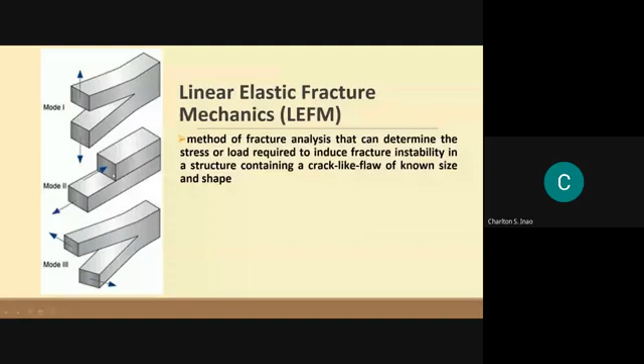If you take a look at this, using the pen... sorry, I'm just using the mouse, I haven't installed the digital pen yet.

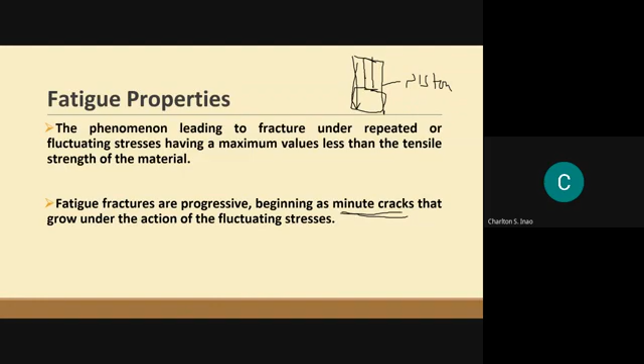Fatigue fractures are progressive, beginning as minute cracks that grow under the action of the fluctuating stress. So when we talk about fatigue, we look at where it first propagates - minute cracks, meaning small cracks, then it propagates, it continues.

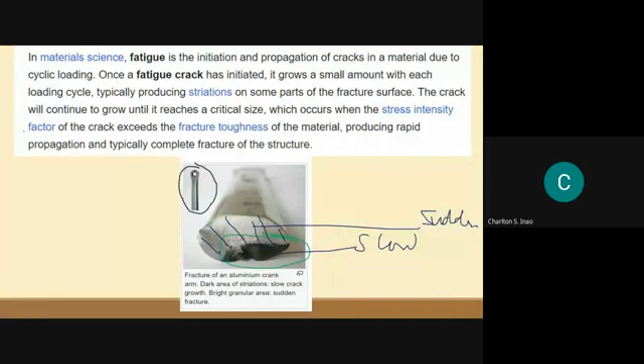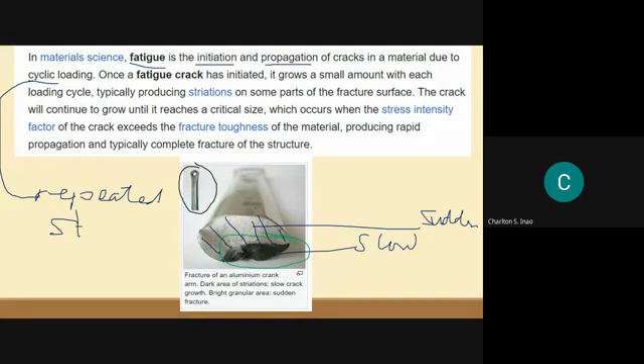So what is fatigue? Fatigue is the initiation and propagation of cracks in a material due to cyclic loading. Repeated stress, cyclic loading - those are our keywords: how it starts and how the crack propagates.

Once a fatigue crack has initiated, it grows a small amount with each loading cycle. When it repeats and continues, what gets produced are striations - on some parts of the fracture surface, this dark area here, those are the striations. It starts slowly.

The crack will continue to grow until it reaches a critical size, which occurs when the stress intensity factor of the crack exceeds the fracture toughness - this is what we discussed earlier, the fracture toughness. This produces rapid propagation and typically complete fracture of the structure. So this is the rapid, sudden part.

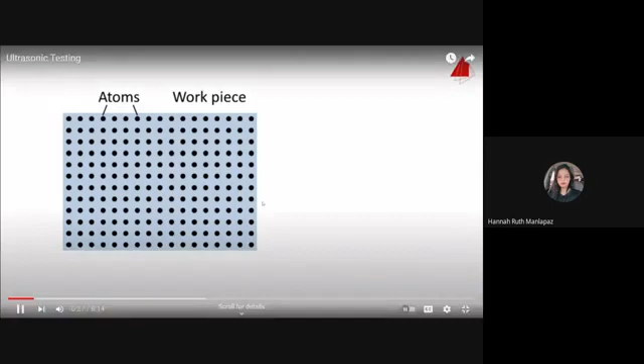Non-destructive testing, ultrasonic examination. The basic principle of ultrasonic testing of materials is the propagation and reflection of sound waves. As an example, a cylindrical workpiece is shown in the animation. The longitudinal section through the cylinder shows the position of the atoms, extremely magnified and simplified as a single crystal. A rigid unyielding stop is attached to the right front end of the cylinder. At the left front end, a disc is installed to transmit and receive sound waves. Pushing and pulling briefly at the disc causes a longitudinal sound wave to propagate through the cylinder.

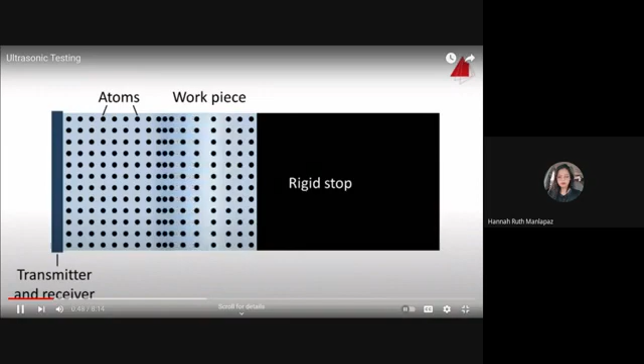When the sound wave reaches the rigid stop at the right side, it is reflected and runs back towards the disc, which now serves as a receiver. A free end is also able to reflect a wave; the tensile side runs ahead in the reflected wave and finally deflects the receiver to the right. The reflected wave is even reflected again and travels several times across the length of the cylinder, though this isn't shown for simplicity. So if a sound wave is generated at one end of a workpiece, it will travel through the material at its speed of sound.

At the free end of the workpiece, the sound wave is reflected and returns to the transmitter, which then acts as a receiver. For ultrasonic testing, not a large transmitter is used in most cases, but a rather compact one, which generates a short ultrasonic pulse.

At a place free from defects, the ultrasonic pulse travels to the right front end, also termed back wall. The pulse is reflected and recorded again as an echo.

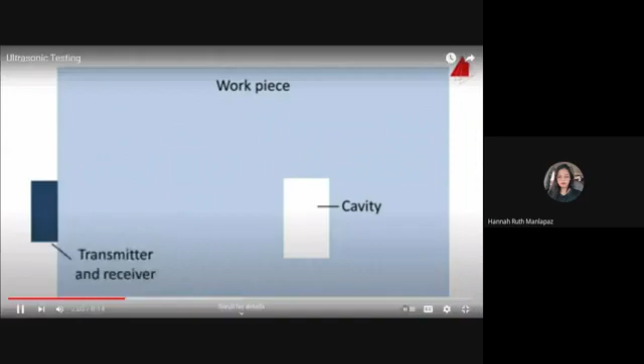When the transmitter is moved a little downwards, the cavity reflects a part of the wave. That part arrives earlier at the transmitter than the rest of the sound wave. Even further downwards, the cavity reflects the complete ultrasonic pulse.

For material testing, either the echo of a defect can be utilized, this is the pulse echo mode, or the phenomenon that hardly any sound waves pass through the imperfection, which is called the through transmission mode.

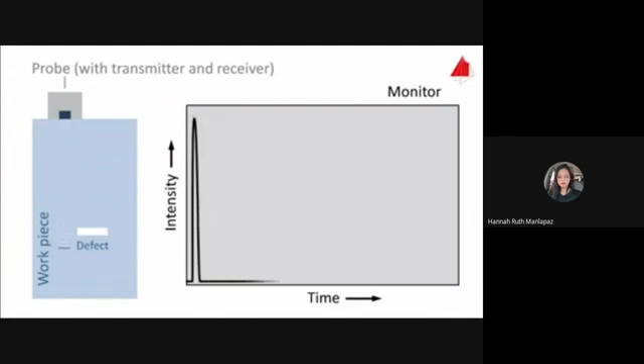In pulse echo mode, a transducer installed in a probe performs both the sending and the receiving of the ultrasonic pulse. On a computer monitor, the intensity is plotted upwards on the y-axis and the time towards the right on the x-axis. With the probe at a place free from defects, only two signals may be seen: the transmission pulse and the echo resulting from the lower surface of the workpiece, termed back wall echo.

Moving the probe towards the right leads to an additional echo created by the defect. Even further towards the right, only the defect echo is visible apart from the transmission pulse.

In our laboratory, there's a green-painted steel cylinder to be found. It contains artificial defects which are invisible from the outside. To track down the defects, the material tester uses the pulse echo method.

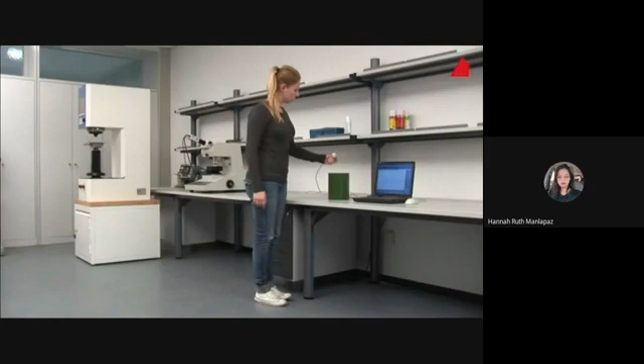This is how a typical probe looks like. Under the bright wear plate, a piezoelectric disc is installed. It can transmit and receive ultrasonic pulses. A computer operates the probe via a plug-in card and power electronics. On the monitor, the intensity is plotted upwards and the time is plotted to the right.

After placing the probe on top of the cylinder, initially no echo at all may be seen on the monitor. The reason for this is the too small contact area between the probe and the workpiece. Only with the use of a gel, the so-called couplant, can the ultrasonic pulses get into the workpiece and also go back into the probe. Now the back wall echo turns up on the monitor.

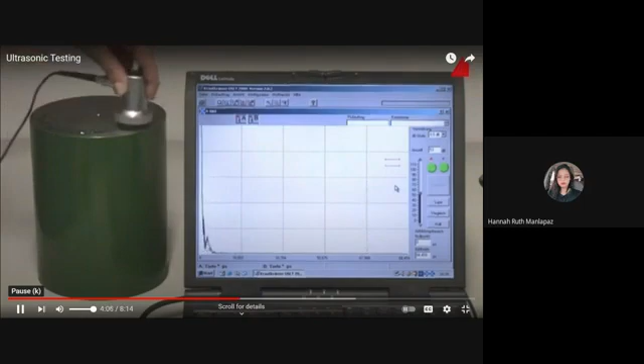The material tester spreads out the gel evenly on the top surface. That way she is able to examine the entire cylinder.

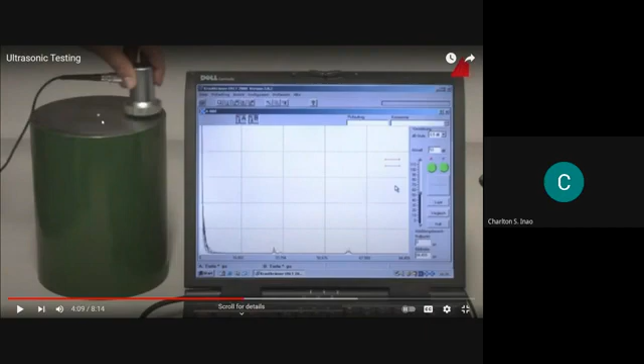Using the velocity of sound in the material, one can plot the calculated depth on the monitor to the right instead of time, a very useful feature.

With the help of so-called trigger gates, which may be set on the echoes with a computer mouse, the depth of the defects can easily be read off at the lower left-hand corner of the monitor. The cylinder back wall lies in a depth of about 200 millimeters below the probe, so the cylinder has a height of 200 millimeters. And here we go.

The material tester scans the upper front end of the cylinder with a probe and observes the monitor. A defect echo appears on the monitor. This defect is located at a depth of 130 millimeters below the surface.

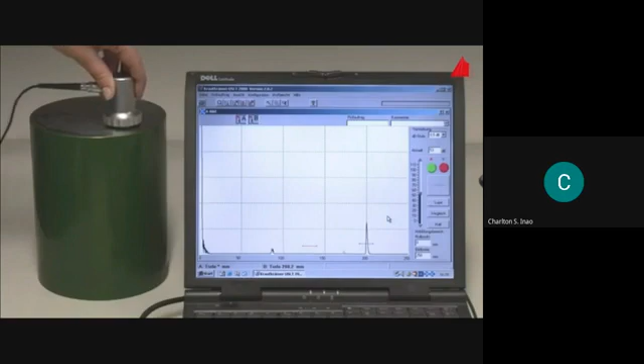Another echo indicates a defect at a depth of 87 millimeters. The second, smaller echo at 174 millimeters is caused by double reflection on the same imperfection.

And these are the defects: a drill hole and a saw cut. Filled up near the surface and painted, they are not visible from the outside. The drill hole is at a depth of 130 millimeters.

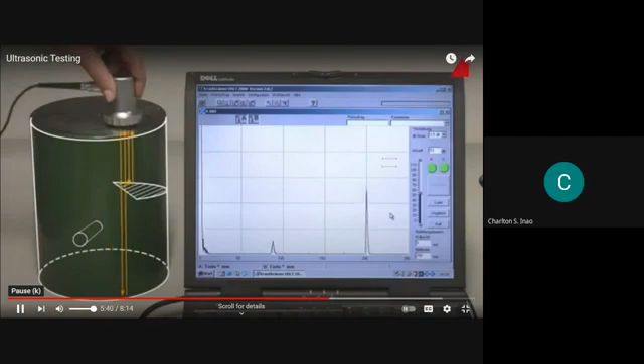The saw cut 87 millimeters below the surface.

Trams are popular means of transport in Karlsruhe in southern Germany. The tram cars are not only cleaned regularly, but also tested thoroughly at regular intervals by the transport company. Among many other maintenance points, the ultrasonic examination of the wheel axles plays an important role.

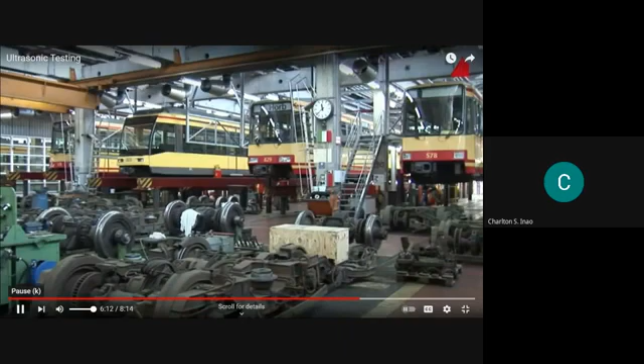A tram enters the maintenance hall for inspection. Some of the tram cars have already been lifted up, so that the bogies can easily be detached, pushed forward and examined carefully. This is one of the bogies jacked up to comfortable working height and prepared for ultrasonic inspection.

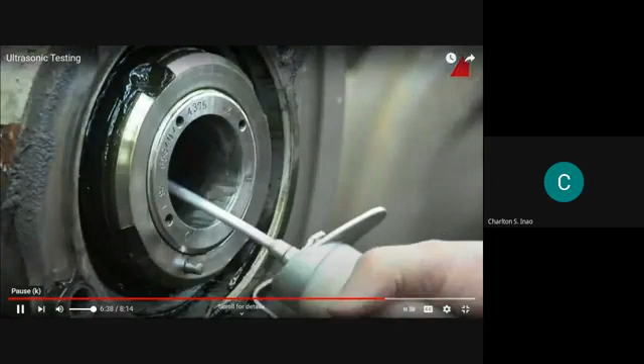Special attention is given to the wheel axle, among experts known as wheel set axle. It has been designed as a hollow axle. This saves weight and facilitates the ultrasonic examination. The material tester applies a suitable oil as a couplant into the bore of the axle.

Now he takes a special probe designed exactly for this purpose, inserts it carefully into the bore with a mount, and evenly spreads out the couplant by turning and pushing. He has accurately marked the most important examination points at the mount.

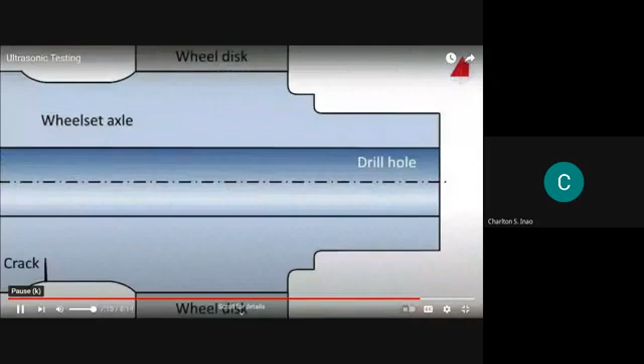In an experienced manner, he positions the probe at the appropriate places within the wheel set axle and watches the monitor closely. The probe has specially been designed for this application. It transmits the ultrasonic pulses at an angle of 45 degrees.

At a place without defects, no defect echo returns. But when the pulse encounters a crack which has grown in from the outside, double reflection occurs and a typical defect echo is recorded. It is important to note that also the shape of the wheel set axle may lead to an echo, for example at shoulders.

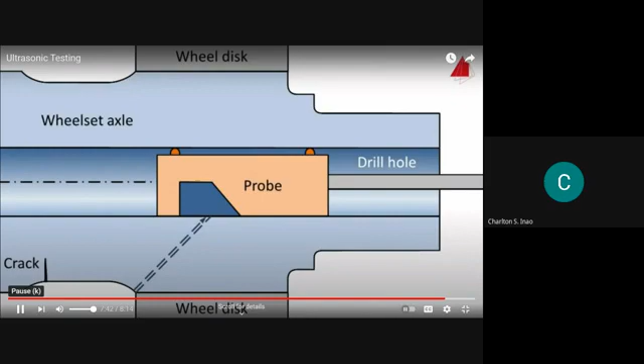These are so-called contour echoes. In this particular case, only contour echoes are recorded. No abnormality has been detected. The wheel set axle is perfect and can be used again to transport many passengers until the next examination becomes due.

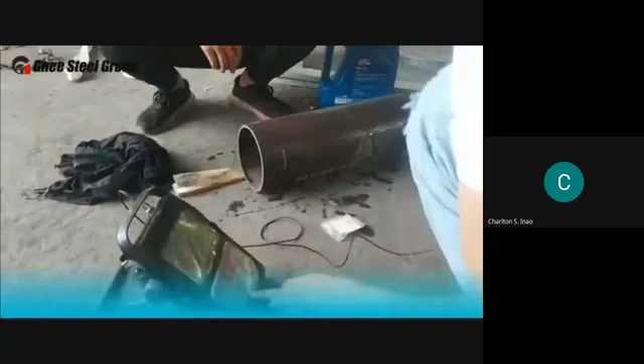Ultrasonic testing. As you know, non-destructive testing is a testing method for inspecting the surface and internal quality of the inspected part without damaging the workpiece or raw material.

According to the research and analysis of NASA, it is believed that non-destructive testing methods can be divided into 6 categories and about 70 kinds. Ultrasonic testing is one of them.

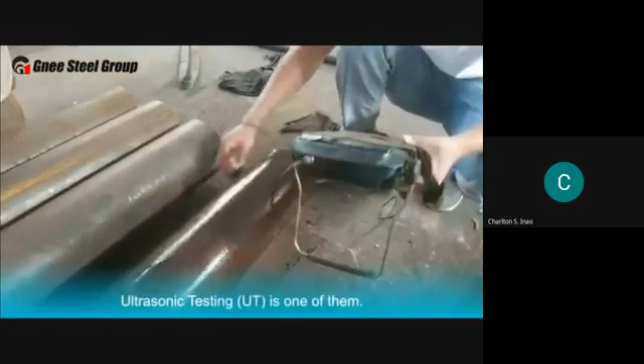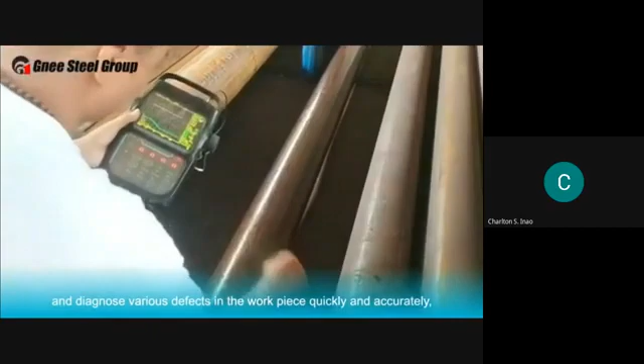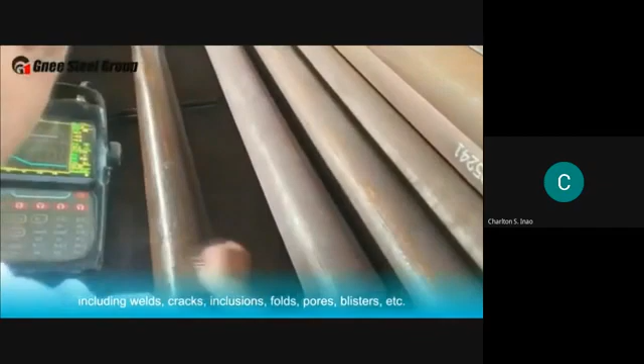It can detect, locate, evaluate, and diagnose various defects in a workpiece quickly and accurately, including welds, cracks, inclusions, folds, pores, blisters, etc. Can be used both in the laboratory and on the engineering site.

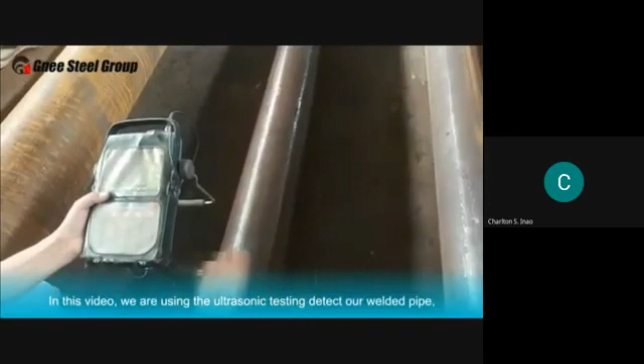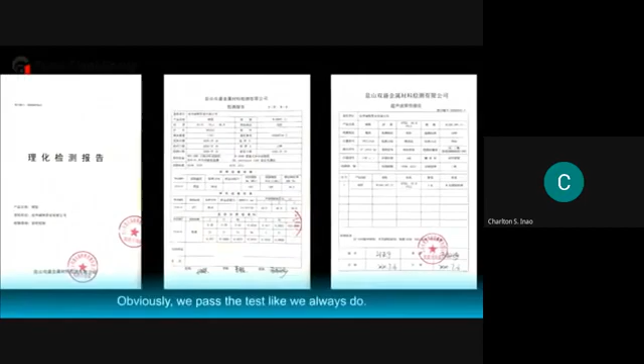In this video, we're using ultrasonic testing to detect our welded pipe to ensure the quality of our products can perfectly fit the requirements of our client. Obviously, we passed the test like we always do.

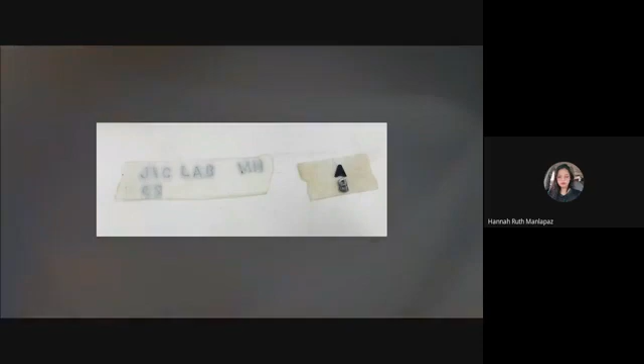The equipment and tools are gamma ray source system, radiographic films, cassettes, and intensifying screens, lead markers, IQI penetrameters, weld specimen, magnetic stand, safety gear, and exposure calculator.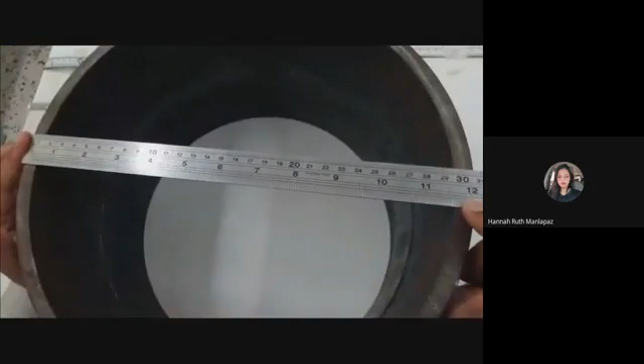First of all, we'll show the inspection which is using single wall single image technique. This technique is applicable for both plates and pipes, primarily intended for pipe diameter of 100 mm and above, where access is permitted.

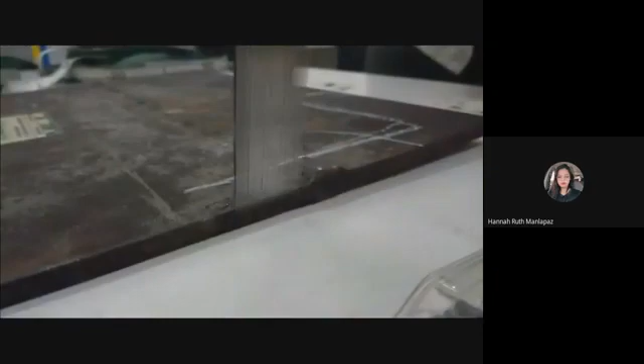The procedure is: after finishing film loading, start to perform this technique as visual inspection of the specimen. Examine the welded specimen visually and note down any surface defects.

Choose the appropriate IQI type according to the sample thickness of the same material as that of the specimen. The IQI should be placed in a proper manner on the specimen, i.e., source side with wires across the weld. Place the film underneath the plate. Place the lead letters.

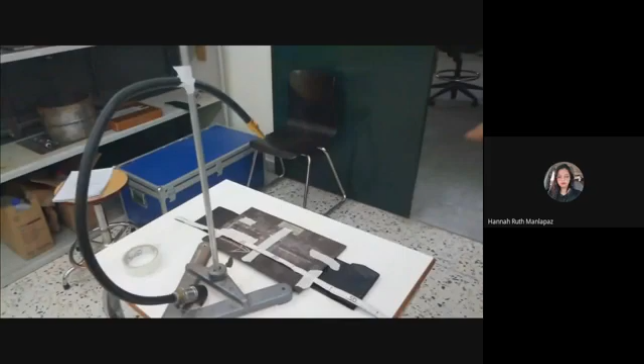Set the source at right angle with the film and weld seam using a magnetic stand. Set the specimen at a proper distance, more than the minimum distance calculated by the rule. Calculate the exposure time by application.

Process the films inside the darkroom. The second technique is panoramic. It should be performed for pipes of outside diameter from 12 inches.

The procedure is: after finishing film loading, start to perform this technique as visual inspection of the specimen. Examine the welded specimen visually and note down any surface defects. Choose the appropriate IQI type according to the sample thickness of the same material as that of the specimen.

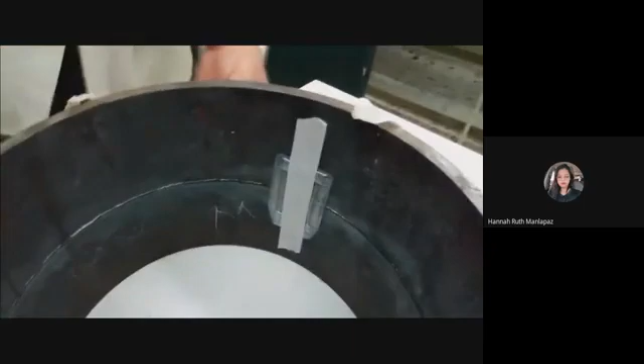The IQI should be placed in a proper manner on the specimen, i.e. source side, with wires across the weld. Place the lead letters. Wrap the films around the welded pipe. Set the source at the center of the pipe using the magnetic stand.

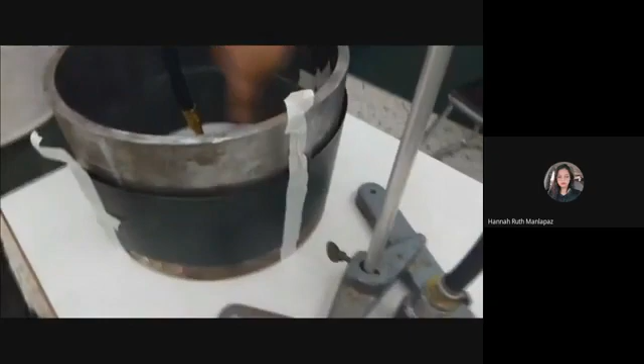Calculate the exposure time by application. Process the films inside the darkroom. The third technique is double wall single image.

It should be used to radiograph pipes of 3.5 inch diameter and above when internal access is not permitted. The procedure is: after finishing film loading, start to perform this technique as visual inspection of the specimen, examining the welded specimen visually and noting down any surface defects.

Choose the appropriate IQI type according to the sample thickness of the same material as that of the specimen. The IQI should be placed in a proper manner on the specimen, i.e. source side, with wires across the weld. Place the letter F, which means film side, because the other technique is source side. Wrap the films around the welded pipe.

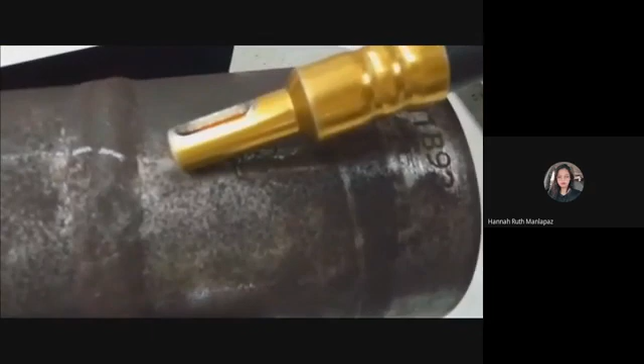Place the source at an angle of 10 degrees away from the cap of the weld, as you see, to take the film from inside. Calculate the exposure time by application. Process the films inside the darkroom.

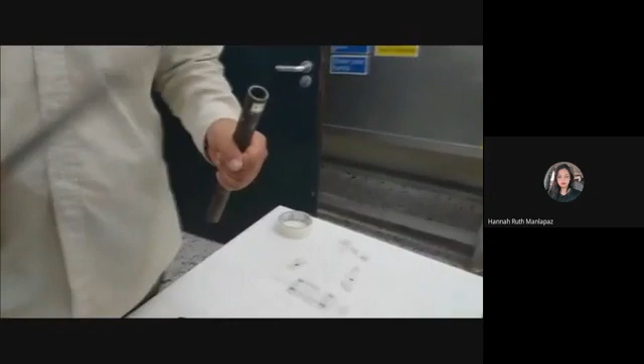The fourth technique is double wall double image. It should be used for pipes with diameter equal to or less than 3.5 inches. A technique can be used in which the radiation passes through two walls.

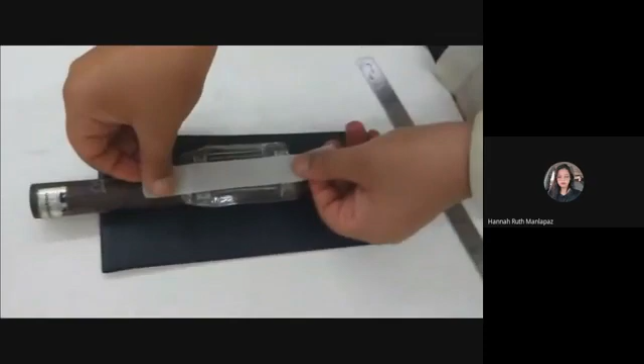The procedure is: after finishing film loading, start to perform this technique as visual inspection of the specimen, examining the welded specimen visually and noting down any surface defects. Choose the appropriate IQI type according to the sample thickness of the same material as that of the specimen. The IQI should be placed in a proper manner on the specimen, i.e. source side, with wires across the weld.

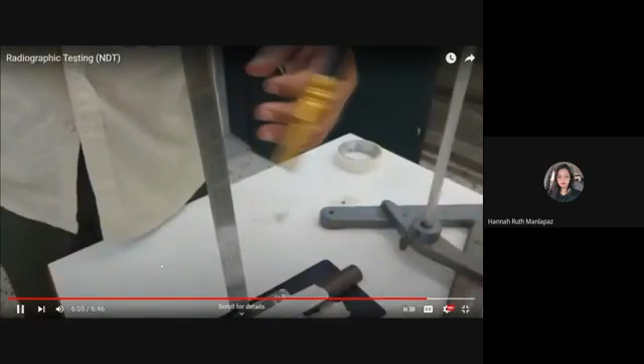Place the lead letters. Calculate the required geometrical unsharpness factors for both superimposed and elliptical techniques. Wrap the films around the welded pipe. Set the source at right angle with the film and weld seam using the magnetic stand, and be careful to place the specimen at a proper distance.

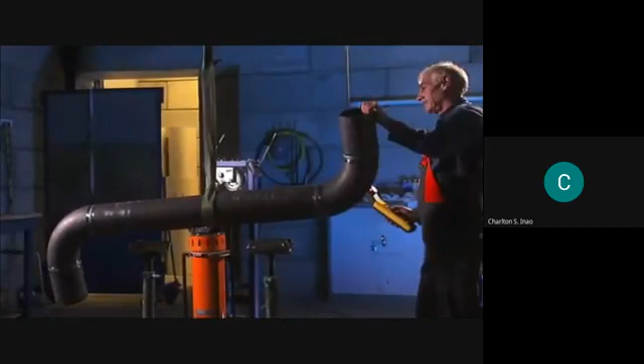Radiography testing utilizes ionizing radiation to achieve an image of an object on several different viewing media. This may be gamma rays, or as in this case, X-rays.

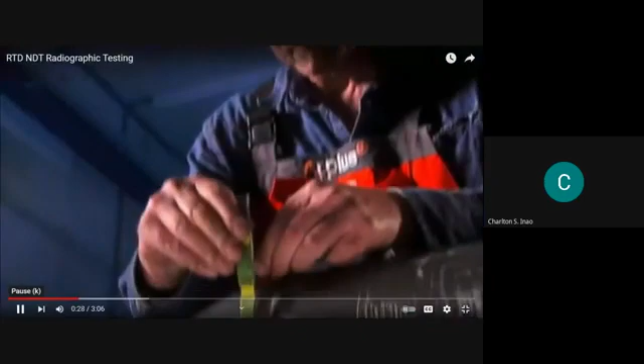This may be gamma rays, or as in this case, X-rays. The examiner marks the weld to be inspected with a measuring tape. This will be visible on the X-ray, so he will know how to determine the exact location of possible irregularities.

The film is mounted on the object, and the X-ray tube is set up carefully.

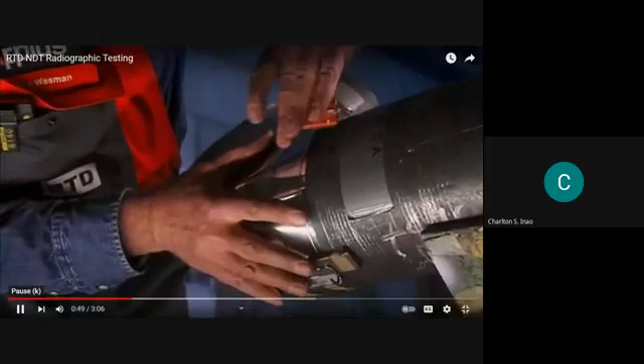The examiner leaves the area, closes the lead door, and operates the device remotely. This way, he avoids coming into contact with the radiation. He adjusts the voltage, current, and duration, depending on the investigated material and the wall thickness. Then he starts the irradiation.

The X-rays go through the material and generate a radiographic image on the film or imaging plate once processed.

The experienced eye of the examiner interprets the image, and he can now determine the quality of the inspected object and whether it meets the standards.

X-rays can also be used to establish the authenticity of paintings, for example. Through the centuries, paint contained different quantities of lead. By exposing the paint layers to X-rays, it is possible to establish whether a cloth was repainted and the period from which the paint layers originated.